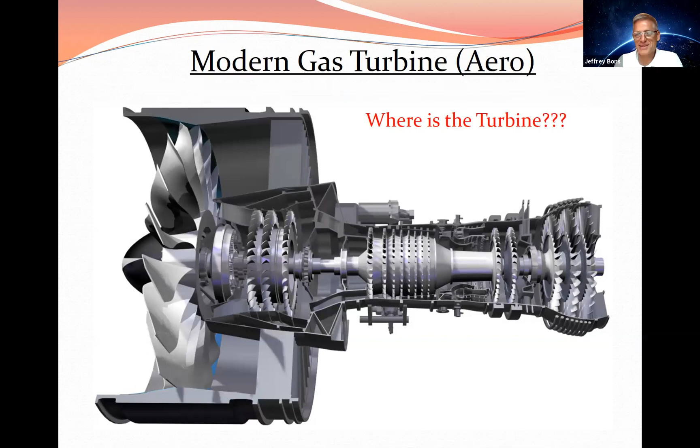I'm going to start off with a quiz to see where my audience is with regard to a turbine. I want you to look at this and tell me where the turbine is. I've selected 6 different spots where it could be—I'll give you a minute to come up with a number. This is a quiz; if you don't pass, that's all right. The turbine is actually just downstream of the combustor, so if you answered 5 or 6, that's the right answer.

We're going to talk about things that happen in the high pressure turbine—that's where the pressure is high, but more importantly where the temperature is very high and cooling is paramount. Then the low pressure turbine, number 6, is the stage that drives the high bypass turbofan, which drives the fan producing 90% of the thrust. So it's very important from an aerodynamic standpoint. That's why the lab is called Aerothermodynamics—we work in both the hot section, where we care about cooling, and the colder section, where it's aerodynamics.

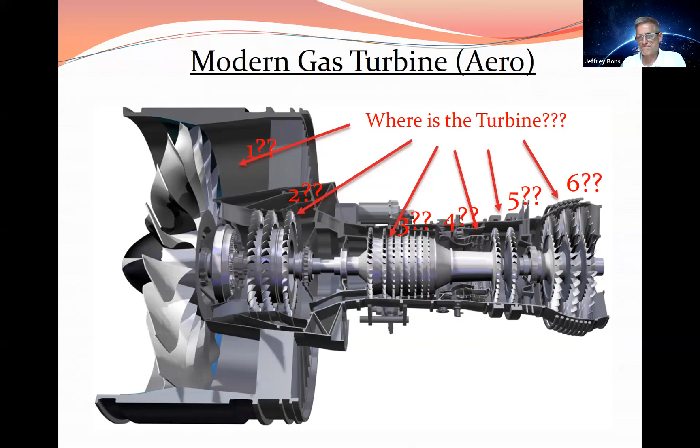Let's talk first about turbine cooling. Cooling is so necessary because historically temperatures have been pushed ever higher in gas turbines to pursue higher efficiency. Efficiency correlates directly, in a Brayton cycle, with the pressure ratio across the compressor. If you look at an isentropic compression, as you increase pressure in the compressor, you also increase the temperature of the gas. So driving to higher pressure ratios drives you to higher temperatures at the compressor exit, which means you have to add fuel at a higher and higher temperature, so it comes out of the combustor very, very hot.

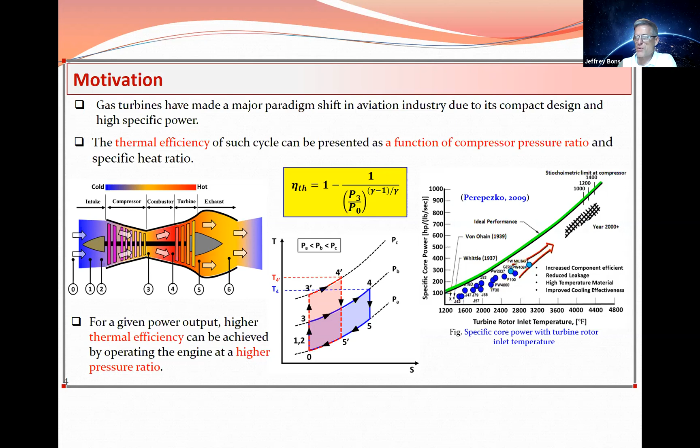Trends over the last 40 years have been to keep pushing that higher and higher. One way they do that is through very detailed architectures internal to the parts, because we're well ahead of metal temperatures in terms of survivability. They also put ceramic coatings on.

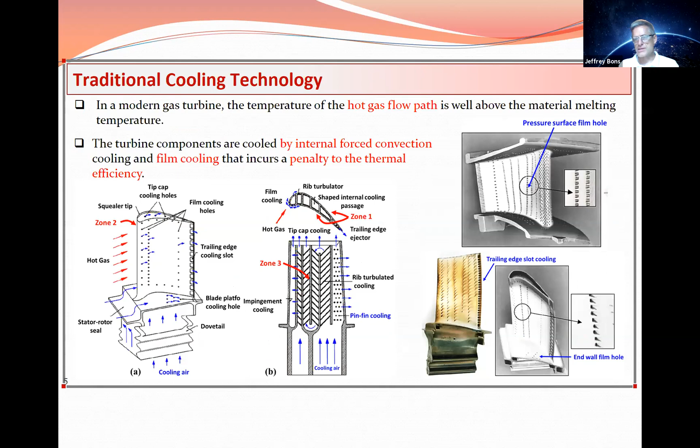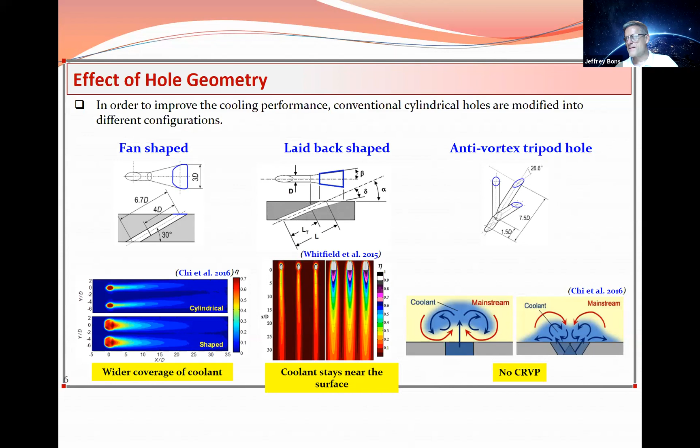This study looks at innovative ways to cool. There have been a number of studies looking at different architectures you could use to blow cool air from the compressor internally inside the turbine airfoils, and even onto the surface through film cooling. Some of these get pretty complicated, intended to mitigate aerodynamic effects due to vortex formation. But think about how to manufacture these through a single crystal nickel-based alloy—it'd be very challenging.

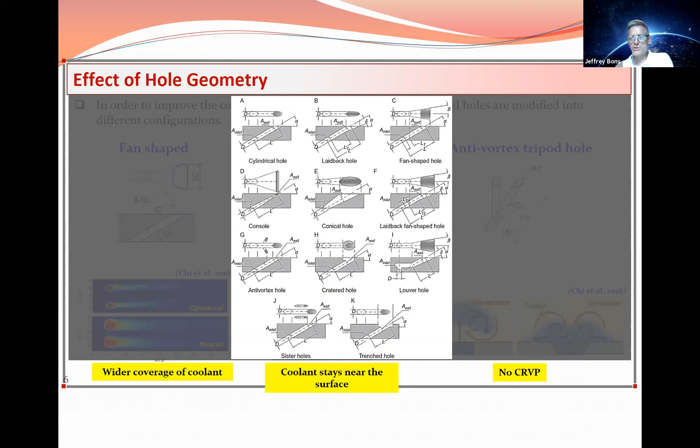Different architectures might be very effective, but might be something you just can't design through traditional investment casting methods. So enters direct metal laser sintering—something you're probably familiar with, sometimes called additive manufacturing. Instead of taking a block of metal and cutting out the parts you don't want to get your final product, you start with a bed of metal powder that can be fused by a high energy source like a laser. As the laser traverses the powder, it creates a solid material, and you build that up in layers, which means you can create some really cool things.

You're certainly familiar with this in plastics through rapid prototyping and SLA, but you may not know this is being done in metals—aluminums, steels, and even high temperature alloys. This is probably only about 5 to 10 years old. These parts could survive in a hot section of an engine, and they're seeing inroads into current designs.

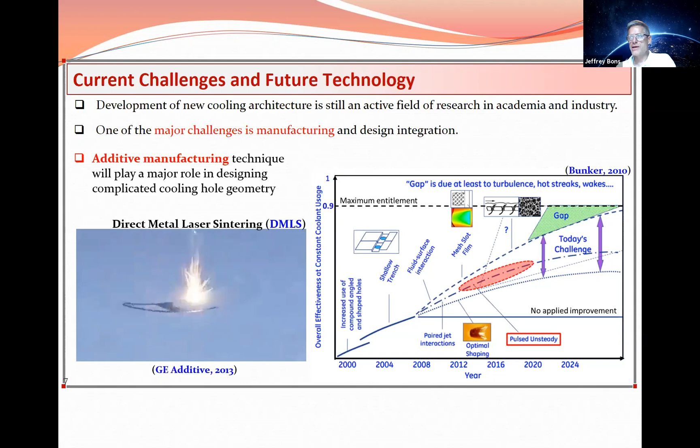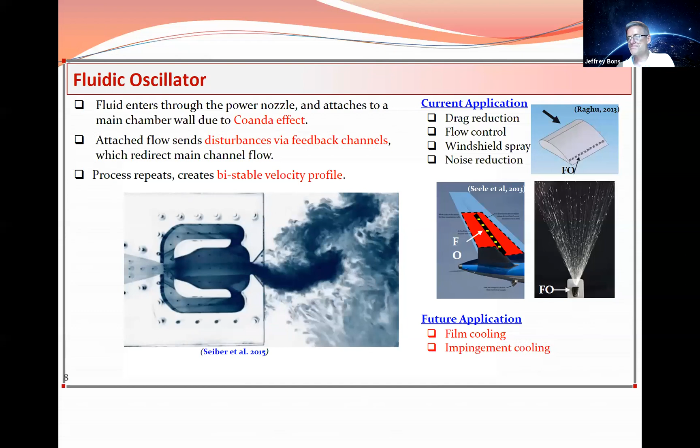That's sort of what's happening internally from a computational standpoint. So we designed some of these ourselves in plastic and characterized the frequency and their spread angle.

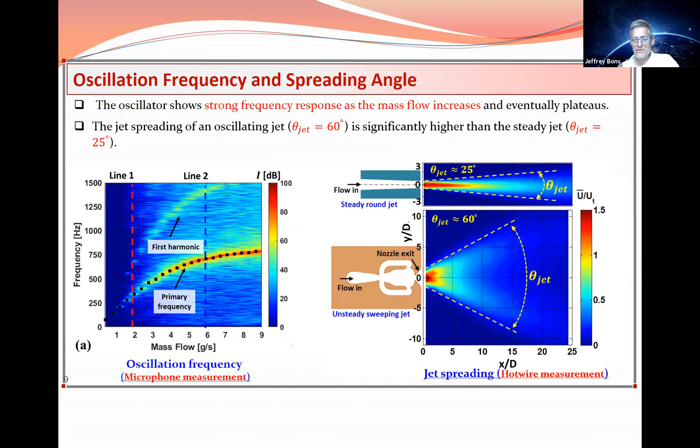And then over the course of about 5 years, myself and some students conducted a very exhaustive test campaign. This is the kind of thing that would happen in our lab. So we would start with these very

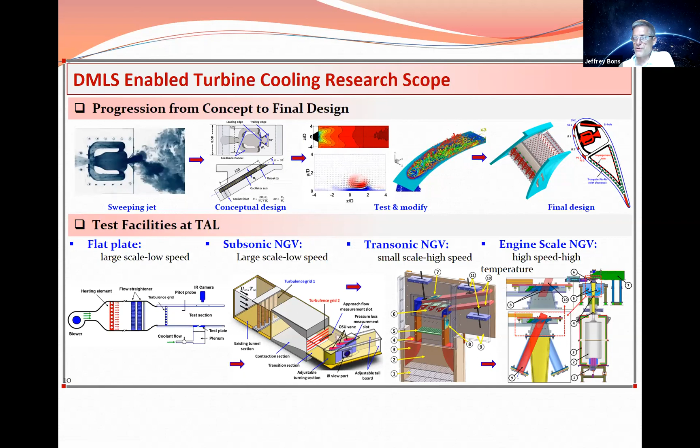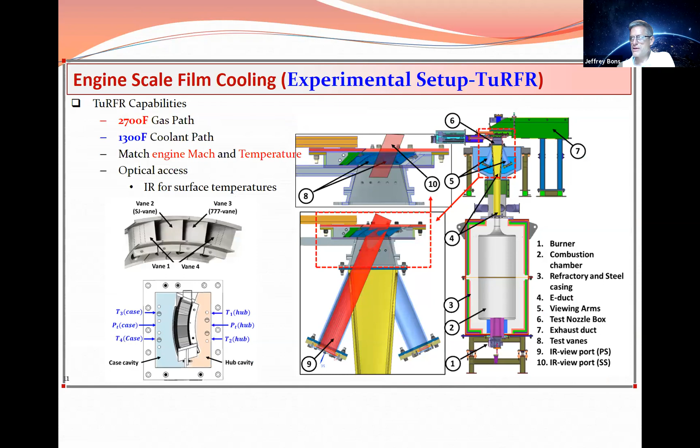So this is the final test that we did. We're operating in our facility called the Turbine Reacting Flow Rig. And we have an infrared camera that allows us to look at the parts as they were installed in the engine, or in this test facility. And then we could run cooling in them.

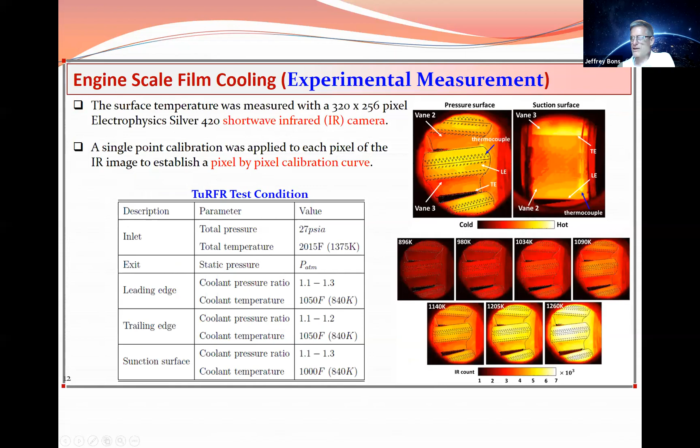And the students sort of capped their 5-year program, funded by the Department of Energy, by demonstrating that we did indeed get significant improvements in cooling with this new architecture. So that was kind of a cradle-to-grave test campaign or research campaign that we conducted that ended last year, and we're continuing some of that in a different venue.

So that's a turbine thermodynamics kind of problem. Here's an aerodynamics problem. So I mentioned earlier that the aft end of the gas turbines for high bypass fan is called the low pressure turbine. And this has really long, slender airfoils, and it's also very heavy. The discs themselves add up to a significant amount of the weight of an engine.

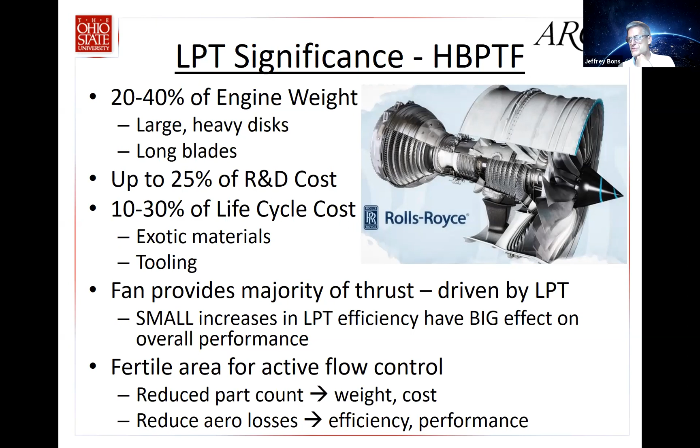And because of how much power is extracted from this flow through the low pressure turbine, even a little bit of efficiency loss makes a huge dent in your overall efficiency. In fact, if you look at what you could do to the specific fuel consumption of an engine by playing around with the component efficiency, you can see that the LPT, or low pressure turbine, gives you twice the bang for your buck compared to the high pressure turbine. HPC, LPC, all of those are a lower return than if you were to adjust or improve the aerodynamics of an LPT.

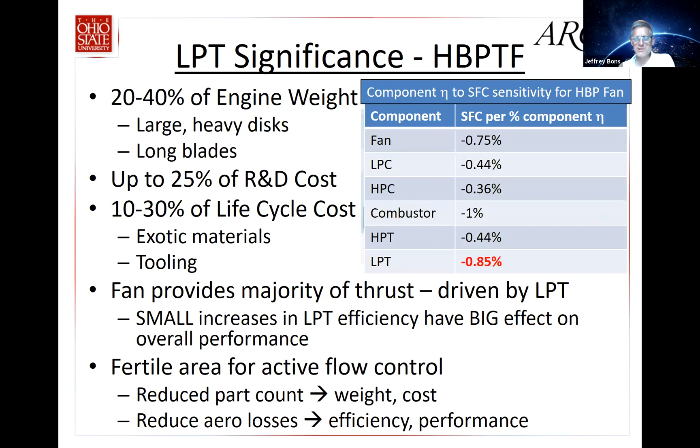So this is definitely something you'd like to do. And the issue is that there's all kinds of complex flow fields in the turbine because of the three-dimensionality of the flow. And also, in an effort to extract as much work as possible, very often the flow gets stalled or separated, much like it would on a wing, but this is a curved surface, a little bit different type of stall. So this is a very complex flow field, and it's ripe for improvement.

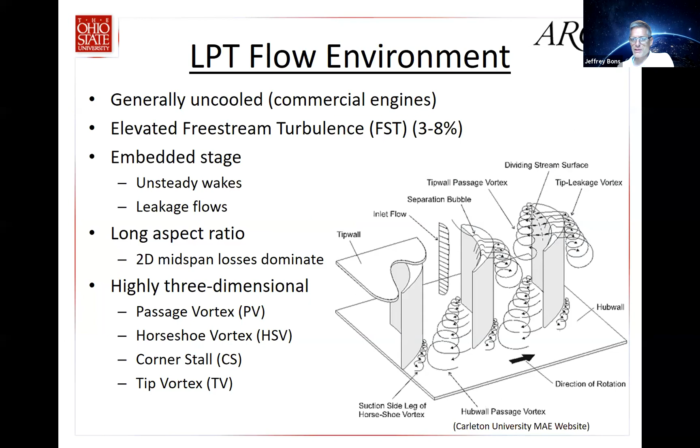We've played around with what's called flow control in this environment, as well as many others. Flow control is where you try to manipulate the flow so it remains attached in this case, or that we clean up these secondary flows. So I'll just go through a breadboard of different ways you can exercise flow control, and then I'll show you some examples.

So if you have a boundary layer, imagine that blue rectangle is the surface of your airfoil where you're trying to extract some work. You want the flow to be nice and attached to the surface so it doesn't stall. You get really high lift or work or power output. So if the boundary layer looks like this shown, then it's incipient separation and it's probably going to stall. You'd really like to energize that boundary layer by blowing tangential to the surface, a parallel flow. And what that'll do is it'll add momentum to the flow, and it may not stall.

So what was the cost? The cost was blowing through some sort of a slot or something like that.

But the win is that the flow over the entire airfoil is now attached, and you can continue to get high work output.

You could do this other ways. You could imagine if I put a big vacuum pump with teeny little holes on the surface, and they sucked air, they'll suck away this low momentum fluid, and sure enough, that boundary layer will again be attached. You might think, why would you want to suck really hot gas, and where are you going to put it? The vacuum's going to melt.

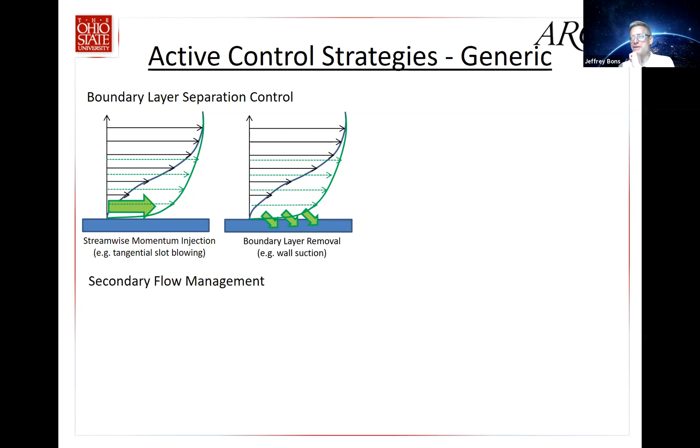But this is used in other environments. Another thing you could do is put streamwise vorticity in the flow. One of the things you're probably familiar with on external aircraft wings, like a civil transport, there are these little metal tabs that stick up about a centimeter or a centimeter and a half from the surface. Those are vortex generators. You'll see them in and around the nacelle, and their intent is to mix up the flow and to stabilize that boundary layer.

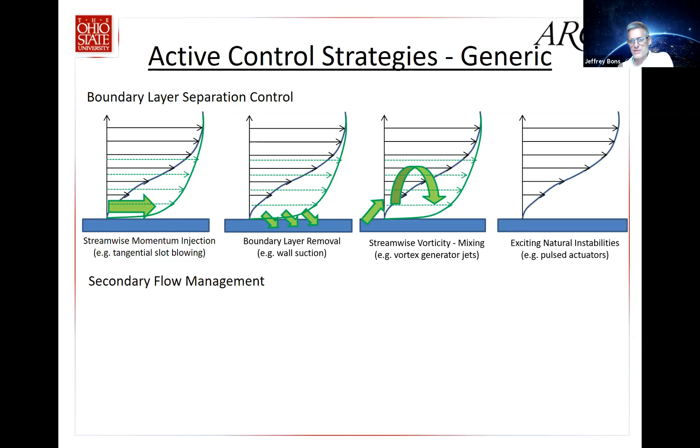One final way that you could do this is through exciting natural instabilities. If the flow is rich with instabilities, then you could excite those somehow and destabilize the boundary layer.

Similar things could be done with secondary flow management, but let me just talk about this specific case of trying to ameliorate the separation over an airfoil to improve the efficiency, or what we're really going to try to do is show it in terms of loss reduction.

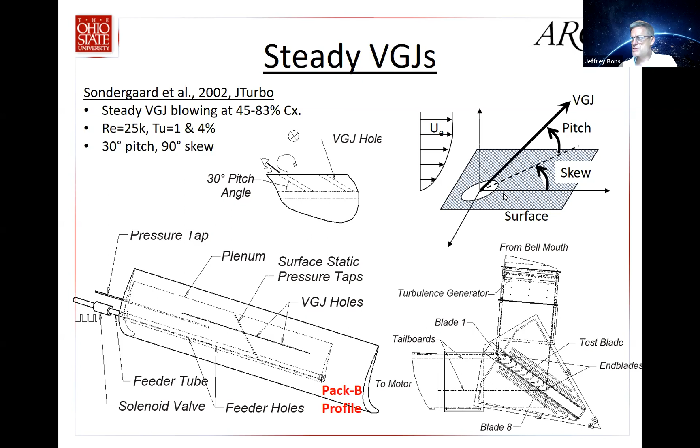So I have an airfoil here that looks like a low pressure turbine airfoil, and I put in these vortex generating jets. It's a jet of air that comes in sort of perpendicular to the flow. It creates this nice vortex, and that vortex contributes in this way: it's going to mix up the low momentum boundary fluid and produce some attachment.

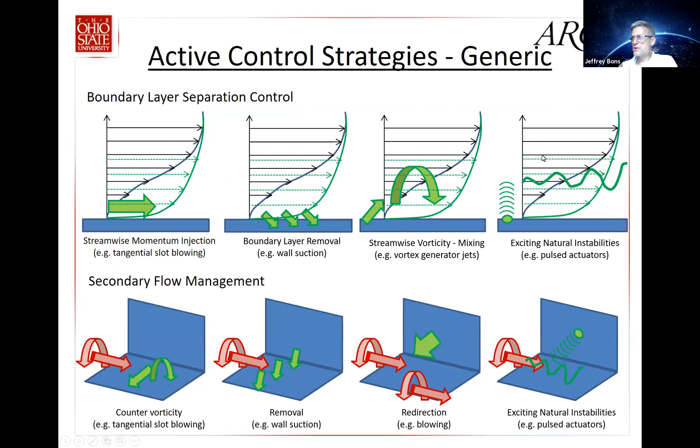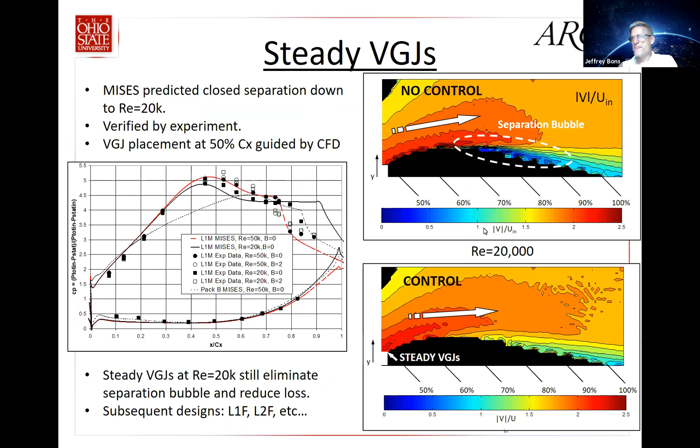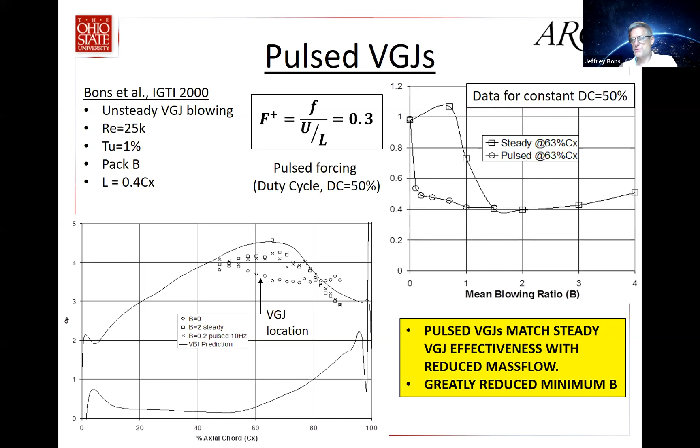We also played around with something called the duty cycle. The duty cycle would be, this is a 50% on, 50% off pulse. Here's a 30%, 15%, all the way down. We found it was pretty incredible, the reduction in loss by just playing around with different frequencies.

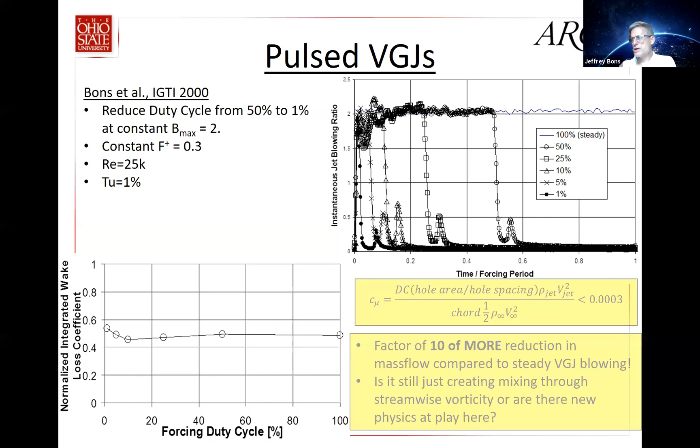So we tried to understand a little bit more of why this happens by looking at some of the dynamics. I'm going to show here, this is on a normal sort of airfoil that you would find on a helicopter rotor or an external wing. It's no longer a turbine airfoil, but it's the same physics.

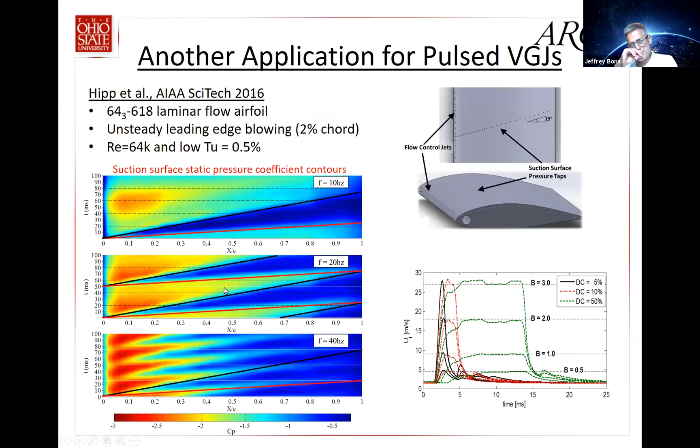But if I pulse at 40 hertz, you can see that I'm pulsing fast enough that I keep this low suction peak pretty high throughout. If I wait too long - 20 hertz or even 10 hertz - then there's sort of a phase lag in the response and it wobbles up and down at a much longer period. So you can play around with different time constants, and surely in a turbine there'd be plenty of time constants because of the unsteady flows.

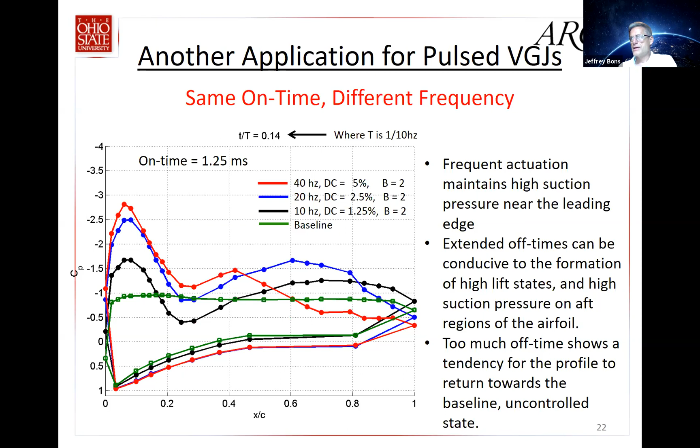What that does is it creates a pitch instability for the aircraft, because the lift distribution that was going out to the wingtip now is stalled, and that's behind the CG, so you're going to get sort of a pitch up without even desiring it, and you may even lose your control surfaces. So this is a bad thing.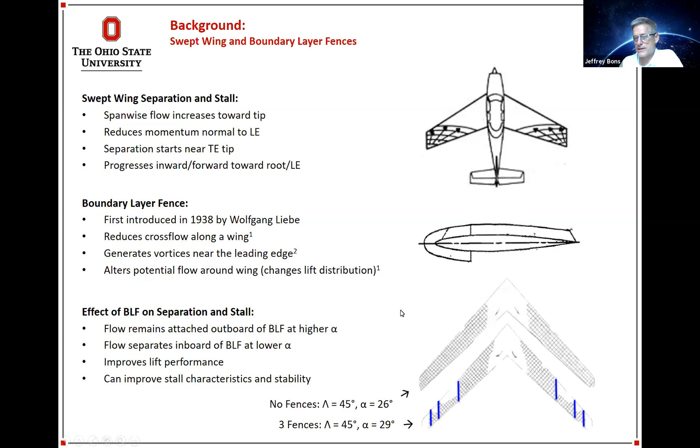It's a metal fence that you add to the wing, and it keeps nice control up into your stall. Of course, that's more metal, more weight, and there's also drag on that little member, and side slip issues. So you'd like to get away from that if you could.

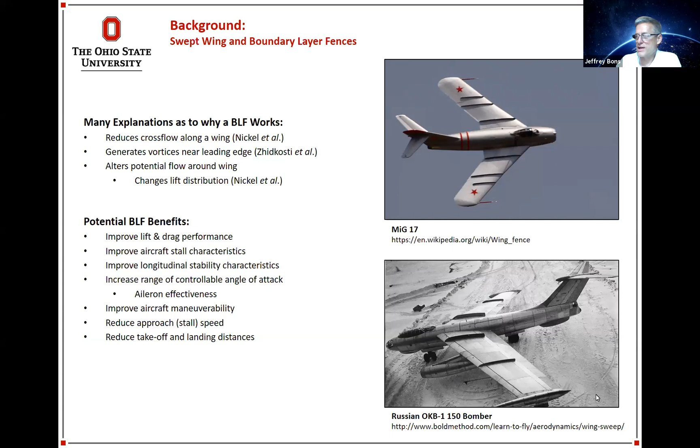So what we've done here is we've played around with something called an active blown slot. This is the passive fence where it's a metal piece, and here we have a slot where we just blow out of that slot.

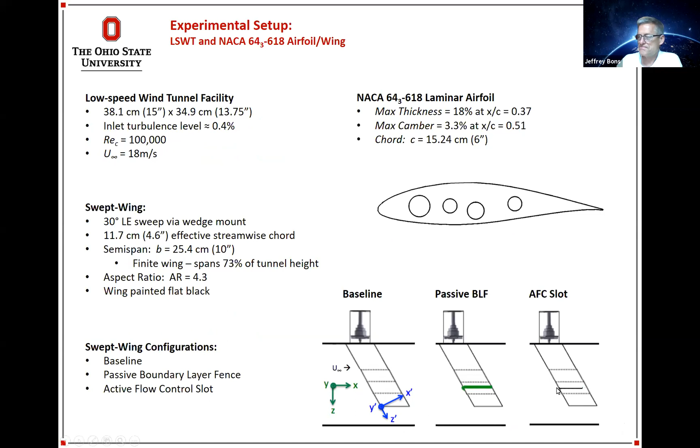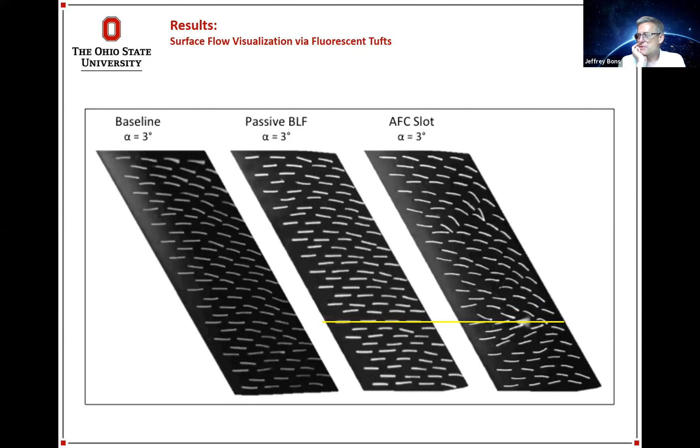So this is something we're playing around with, doing research on currently for the Department of Defense, to see about implementing this in an actual aircraft.

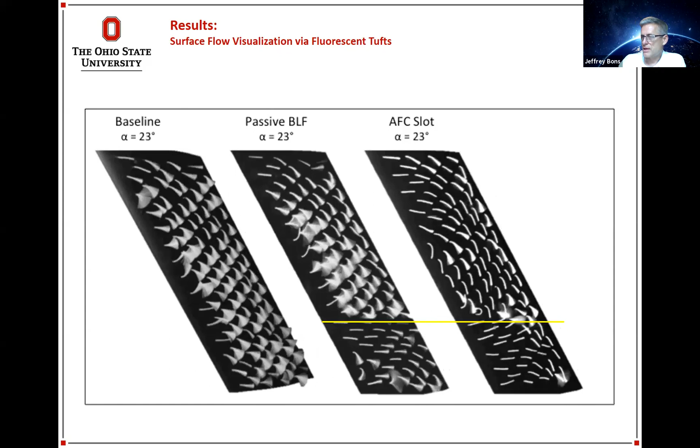So the last topic is on turbine deposition. You might wonder what's going on with this. Well...

Aircraft, you'd love it if they always flew through really clean air, but a lot of times you don't have control over that - there may be a storm, a volcano, or just industrial pollution. Fine particulate. You can see from this map that certain regions of the globe have very, very high concentrations of particulate matter in the 2.5 micron range. So this is pretty fine stuff.

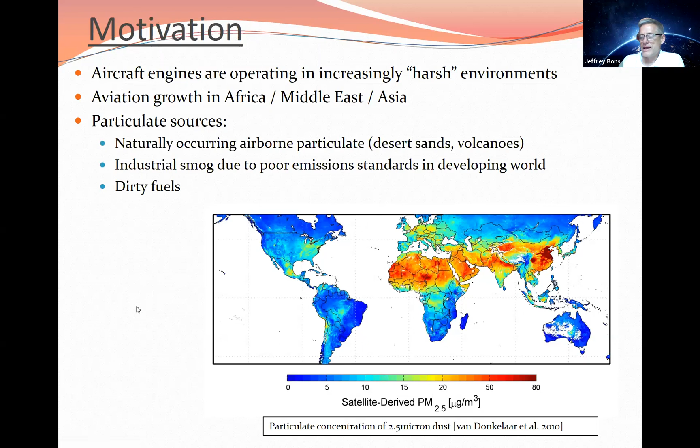Flying in those regions means you're going to have a lot of dirt ingested in your engine that gets collected on surfaces. And why is that bad? Well, it can erode surfaces, making them less efficient. It can also clog cooling holes back in the hot section. That would be bad because it's like plugging up the radiator on your car - pretty much you're going to be at the side of the road. But in an aircraft, there's no side of the road, so it could be a really bad situation, right?

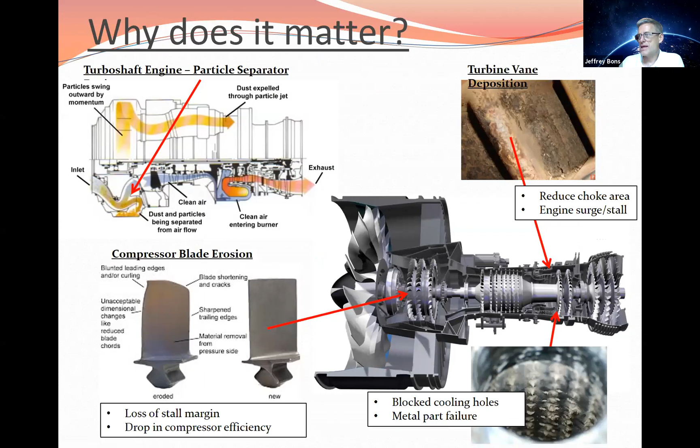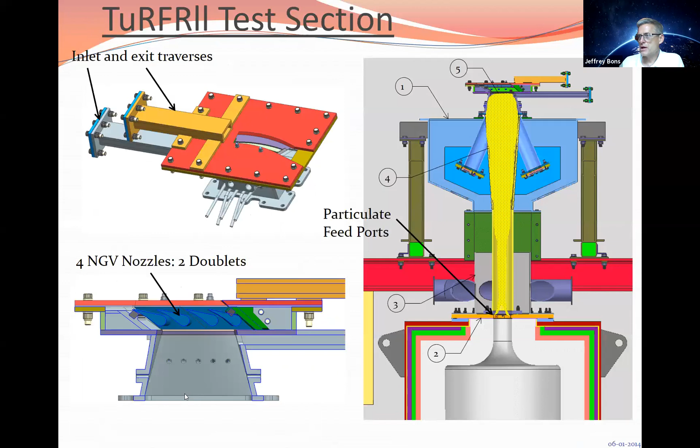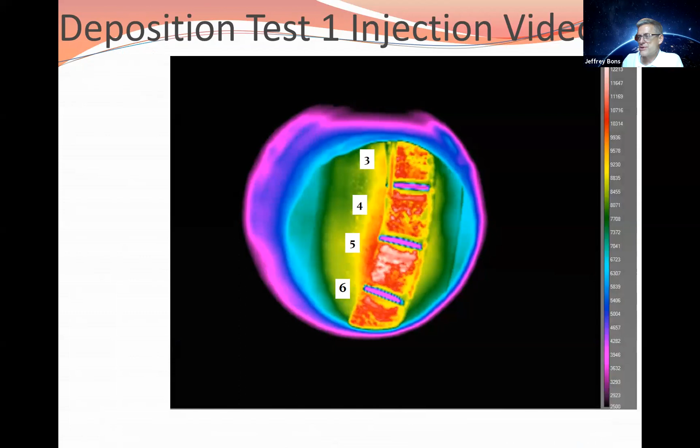So we have some facilities where we can actually add fine particulate to a hot gas stream and see how it collects on a surface. This is a recording showing some turbine airfoils - these are turbine vanes - and we're going to add some dust right about now. You can see how quickly that accumulates on those surfaces. These are uncooled surfaces, so the temperature is well above the molten temperature of the dust, and it just really clogs up everything on those airfoils, and it looks pretty nasty.

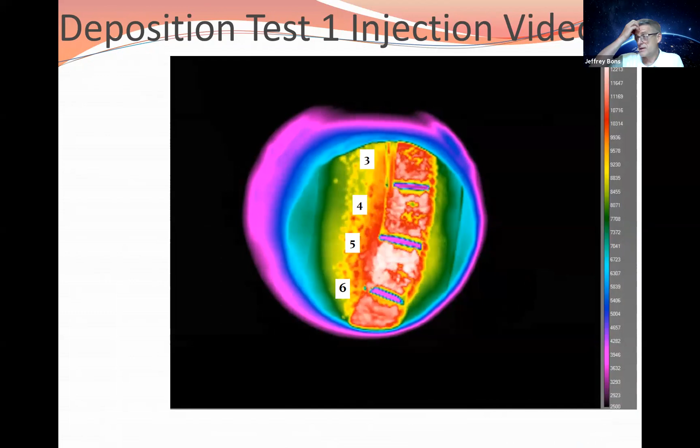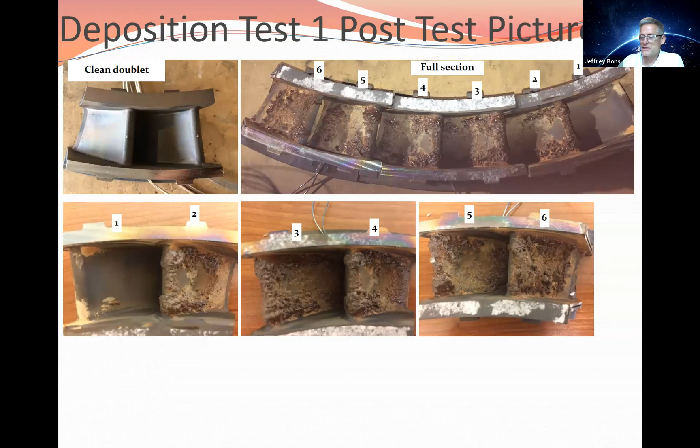So you want to mitigate this, or at least design an airfoil so that it doesn't lose performance so quickly - these would be sort of dirt-tolerant designs. We're kind of at the forefront of this technology and have sponsorship from several of the engine companies to look at this phenomenon.

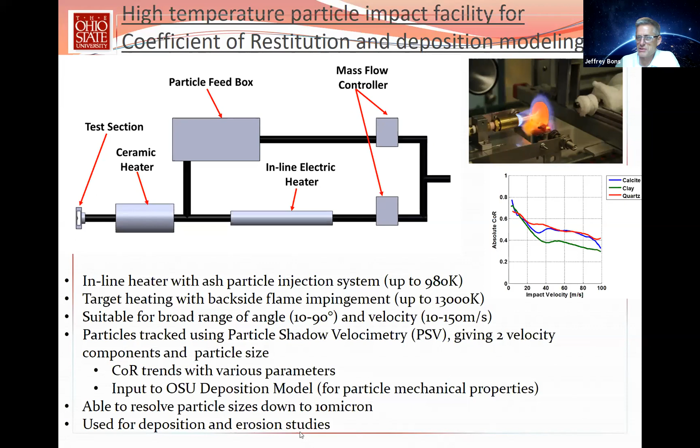In this case, we have the whole gamut of different types of facilities. We have a flat plate type fundamental test series where we have an impinging jet on a really hot coupon, and we look at how those particles impact. We take high-speed imagery, like 40,000 frames per second, of fine quartz hitting a surface and rebounding, and that helps us understand the mechanics of what occurs.

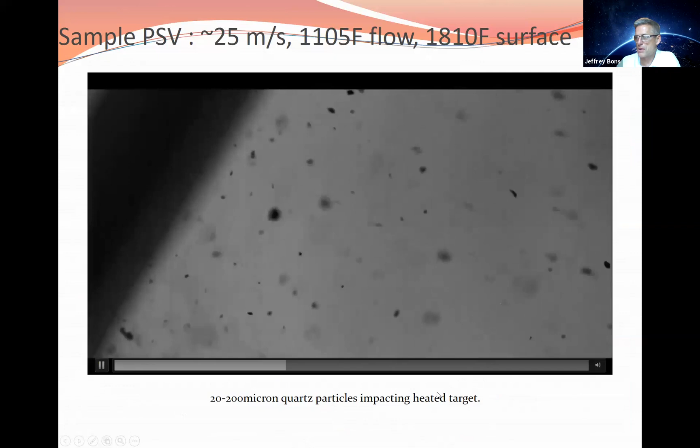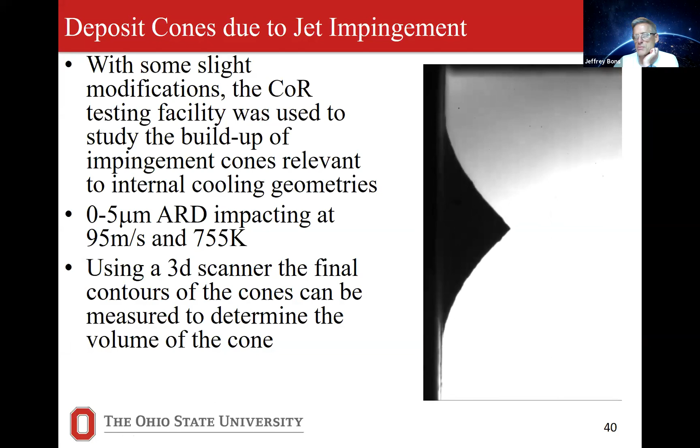We can also monitor - this is like a millimeter diameter jet that's impinging on a wall. Again, this is high-speed photography with a sort of microscope or focusing lens. And then we have super high temperature facilities where we can take the temperature to 1500, 1600, 1700 Kelvin and produce deposits that might appear in an engine at these same temperatures.

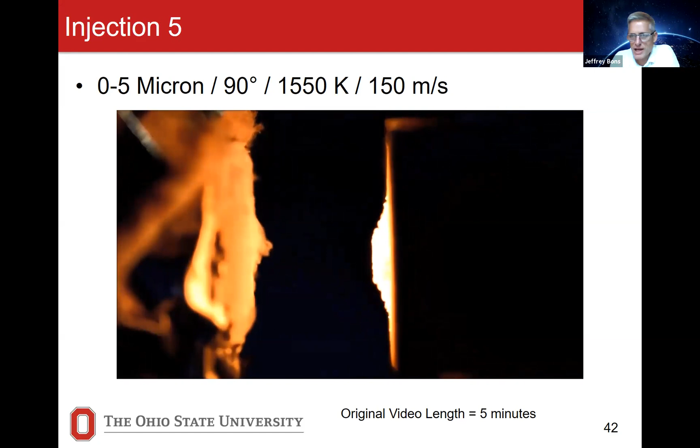Because the goal is not just to test and find out what conditions create bad deposits, we also have a lot of modeling going on in our lab where we're trying to predict what would happen if you fly through a certain environment and how quickly things will become untenable, maybe even catastrophic for the engine.

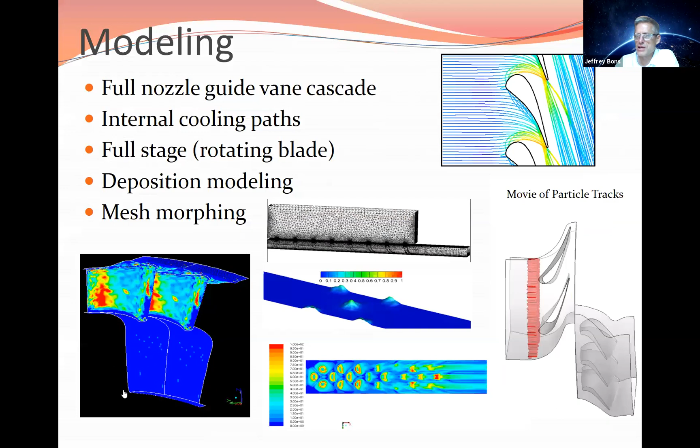So these are just some simulations. This is one where we're actually monitoring particles as they move through a time-accurate solution. So this is the rotor moving relative to the stator. And you can see these small particles kind of follow that flow.

If you put large particles in that same flow field, you notice now that they're very ballistic, right? So they're sort of bouncing off the surface and coming back. And that means they have a different trajectory, and they also hit the surface differently. And they may be more or less molten depending on the size as well.

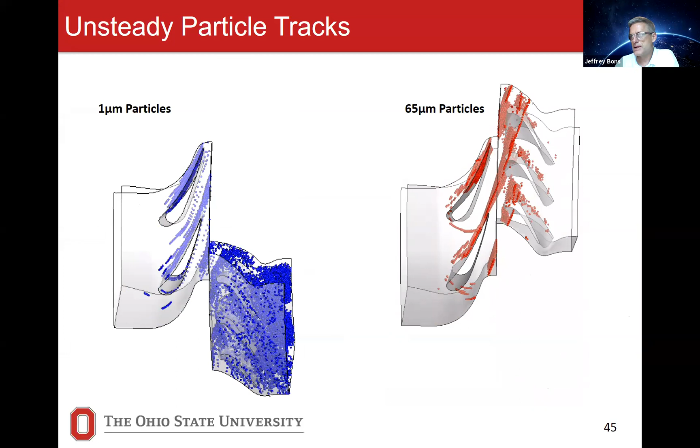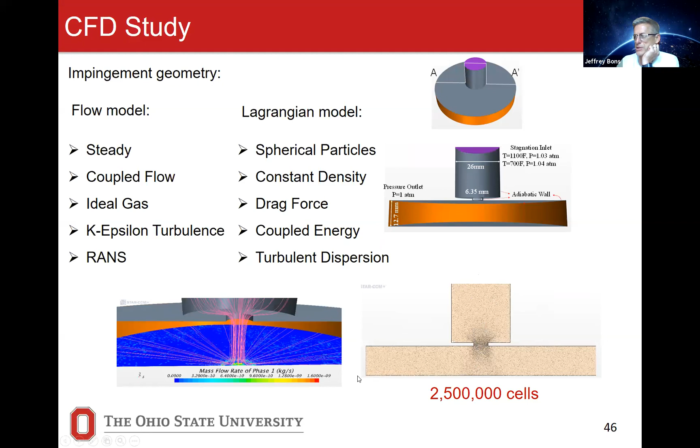We're looking at different ways we can account for the buildup on the surface. So this is a simulation where we have a particle flowing through this jet onto the surface, and it creates these mounds that we saw before. And in this case, this is the experimental progression, and this is the computation that we've derived to try to model that.

So we're getting higher and higher fidelity in our simulations. This is a very active area for us. We have government as well as industry funding, and we're probably looking for at least another student in the fall to be involved in that work.

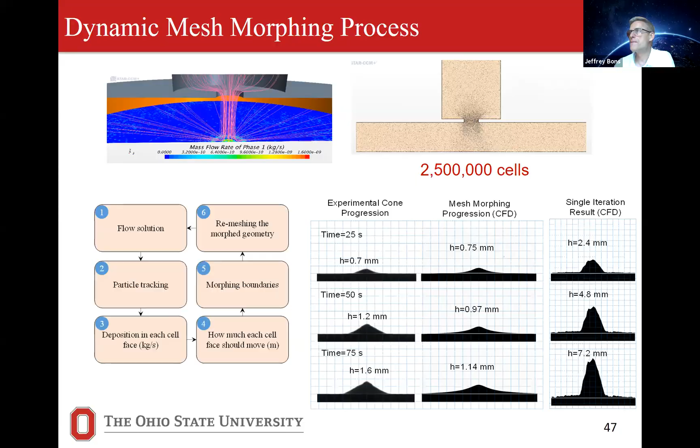First question: does additive manufacturing allow single crystallization? That's a great question, and I'm not a metallurgist. I would guess not, but don't quote me on that. Just in case the person who asked isn't familiar with what a single crystal is, or others aren't: you would typically make these turbine airfoils through an investment casting procedure where you make a mold that's the negative of that blade, and then you pour molten metal into it. Then you let that cure, crack off the ceramic mold, and there you have your part. It turns out that if, instead of allowing that to cool uniformly, you cool it directionally, you can actually align all the crystals so that they go in the radial direction. That makes for the strongest part per weight for a rotating piece of equipment. So that's what single crystal is—you align the crystals in the direction of the radius of rotation. And honestly, I don't know whether DMLS allows you to do that.